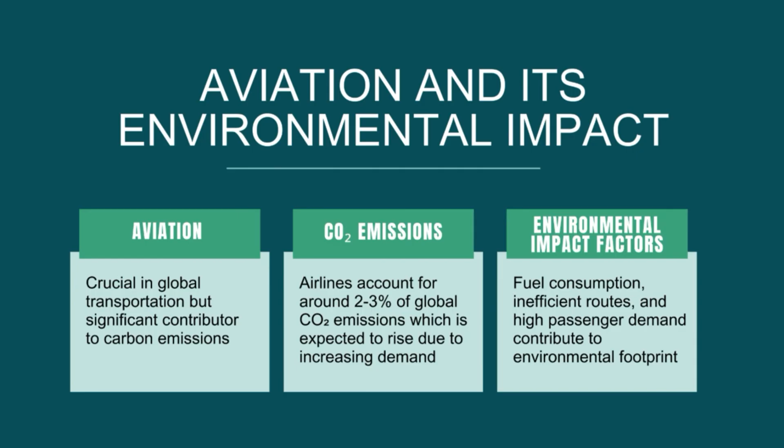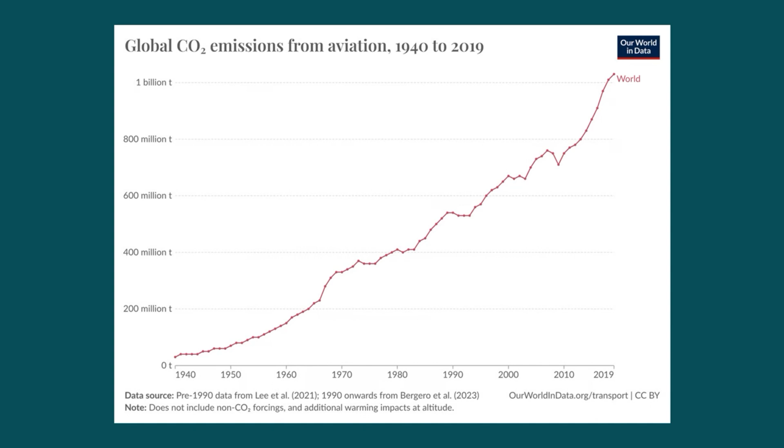Unlike cars and buses, where we are seeing electric alternatives, aviation doesn't yet have a large-scale solution like electric planes or hydrogen fuel that can immediately replace jet fuel. That means we need to look into other ways to cut emissions, like optimized flight operations, which is a big one.

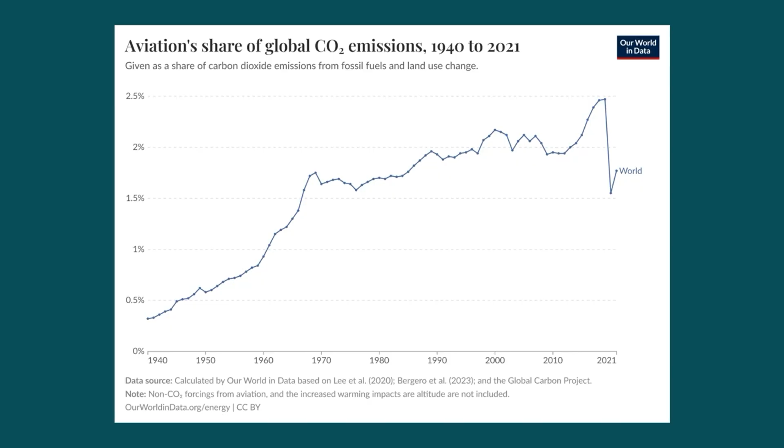So as the demand for travel continues to grow, it's crucial that we focus on sustainable strategies to reduce airlines' carbon footprint while maintaining efficient global transportation. So we talked about fuel and route inefficiencies contributing to emissions. So what about airline reservations? How do they fit into sustainability? We might not think of them as a major factor, but they play a significant role.

Reservations impact flight scheduling, route planning, and passenger load factors, all of which affect emissions. When flights are underbooked, they still burn the same amount of fuel, but with fewer passengers, increasing emissions per person. Inefficient reservations lead to last-minute changes, extra stopovers, and higher fuel consumption.

The solution is a data-driven reservation system that can improve seat allocation, predict demand, reduce unnecessary flights, and many other things. By optimizing schedules, we can cut down emissions and make flights more efficient. And this is where sustainable analytics frameworks come in.

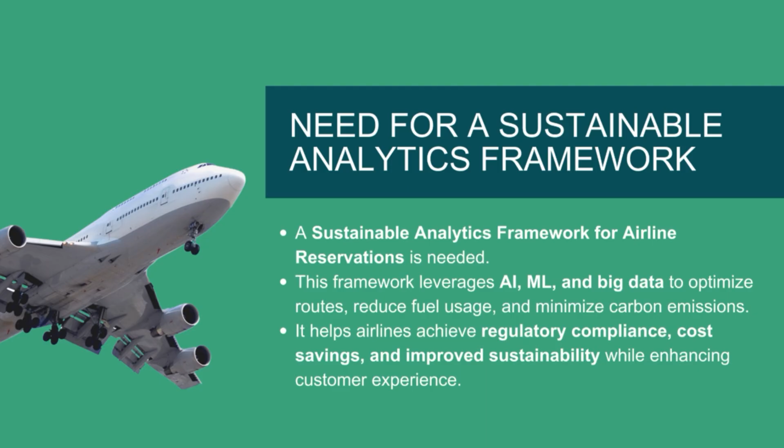So to address the challenges we discussed, airlines need a sustainable analytics framework, a system that uses artificial intelligence, machine learning, and big data to optimize airline operations. This framework reduces emissions, lowers fuel costs, and enhances sustainability efforts. It also helps airlines comply with global sustainability regulations, ensuring long-term environmental responsibility.

This framework is built on 4 key components, each playing an important role in improving airline sustainability. So we have data collection. The first step is gathering flight data, weather patterns, fuel usage, and passenger trends. This helps airlines understand their operations better.

Second is optimization and analytics, where we use AI and machine learning algorithms to analyze this data and find the most fuel-efficient routes, reduce idle time, and improve passenger load balancing. Also, real-time insights are important, as they help airlines make informed decisions on scheduling, aircraft allocation, and route planning. And it helps them provide eco-friendly travel options.

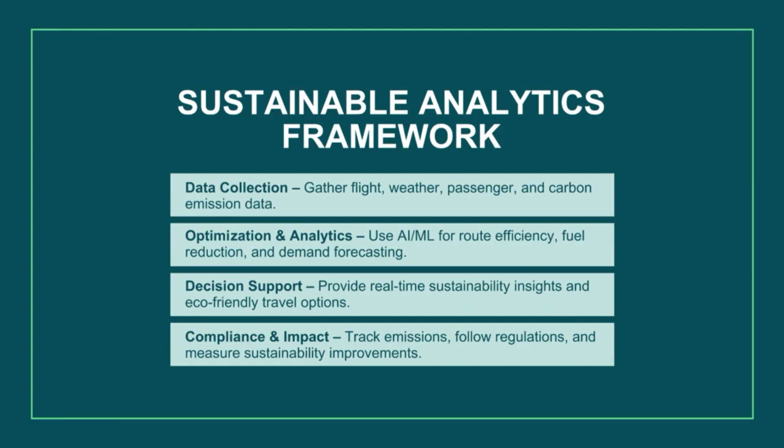So the last one is compliance and impact tracking. This framework ensures that airlines meet sustainability regulations like ICAO, IATA, and CORSIA, while also tracking emissions reduction progress. So what are the real-world benefits of this framework? Here's how it makes a difference.

The first benefit is that AI helps airlines select the most fuel-efficient path, cutting unnecessary fuel burn, and it reduces operating costs as well. The second one is lower carbon emissions. By reducing waste, airlines decrease their overall environmental footprint. And also they can provide eco-friendly travel options.

Passengers can get insight into their carbon footprint and can make more sustainable choices. Another benefit is better scheduling and load factors. Flights run closer to full capacity, reducing the number of empty seats.

Regulatory compliance is another benefit. The airline meets strict environmental guidelines, avoiding penalties and maintaining a positive brand image. Finally, a stronger market reputation. Eco-conscious travelers are more likely to choose airlines prioritizing sustainability. Ultimately, this isn't just good for the planet, it's also good for the business too.

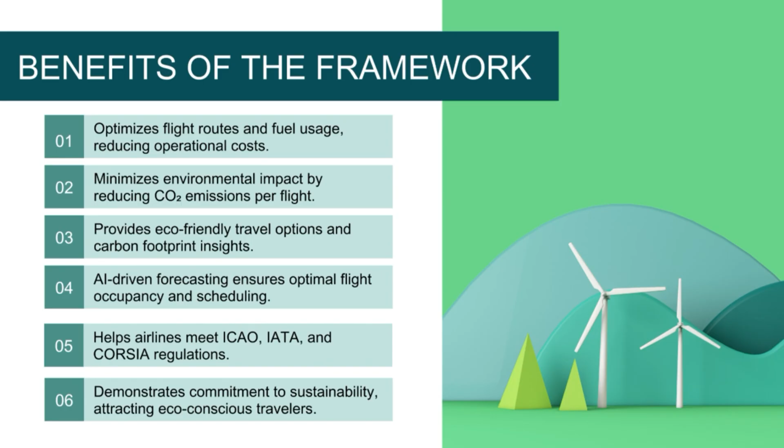Hi, I'm Chloe. I'm going to be talking about parts of our framework, first starting with the optimization of flight routes. Here I'm going to be talking about user-preferred routing and the Advanced Air Traffic Management System.

So first starting with user-preferred routing, or UPR for short. This allows pilots to select their own flight paths instead of following the fixed airway path. This enables a more direct and fuel-efficient route. The way this is implemented is that airlines would use real-time weather, wind patterns, and air traffic data to determine the optimal route to their destination. Some of the benefits include reducing flight time and fuel consumption, and it also lowers carbon emissions and improves the overall flexibility of their operation.

An example of this was implemented in Australia by Airservices in trials, and they saw that UPR helped reduce fuel burn by up to 26 tons per year for every route, and it cut emissions by 82 tons of CO2 annually.

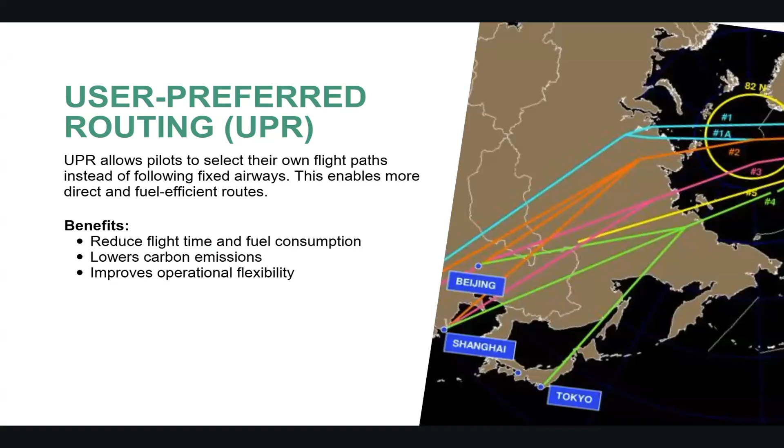Next is the application of advanced air traffic management systems, or ATM for short. This allows air traffic control through the use of automation, AI and satellite-based navigation to improve overall flight efficiency. Examples of this innovation in the US include NextGen, which uses GPS-based navigation for more efficient flight paths. And in Europe, they applied SESAR, which aims to integrate AI and automation for traffic flow to ensure fewer delays in flights.

The benefits of applying this include reducing the holding patterns of flights on the ground and any unnecessary fuel consumption while they're on the ground. This also improves on-time performance and increases overall safety and efficiency of the flights.

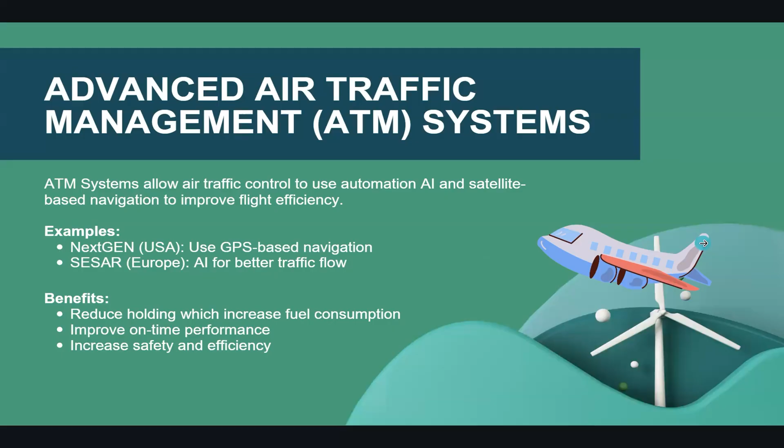A case study of the application of these innovations is Finnair. They looked at sustainability efforts in optimizing their route efficiency. The problem they were seeing was high fuel consumption and emissions, which impacted their cost and sustainability efforts. The way they navigated this was the use of AI in their planning software, which helped in optimizing their routes and saving fuel every flight.

They did this through optimizing their fleet use. They would change the aircraft based on what was more efficient for the number of passengers booked, whether that be using a bigger or newer aircraft or a smaller aircraft, depending on demand, as well as route optimization. Utilizing wind-assisted navigation was ideal, or direct flight paths to help figure out a route.

Another strategy was continuous descent approach. This is where the flight would reduce fuel burn when landing by having a straight or smoother descent overall. And then fleet modernization. A lot of newer aircraft help reduce fuel use, and an example is the Airbus A350, which reduces fuel use by 25%.

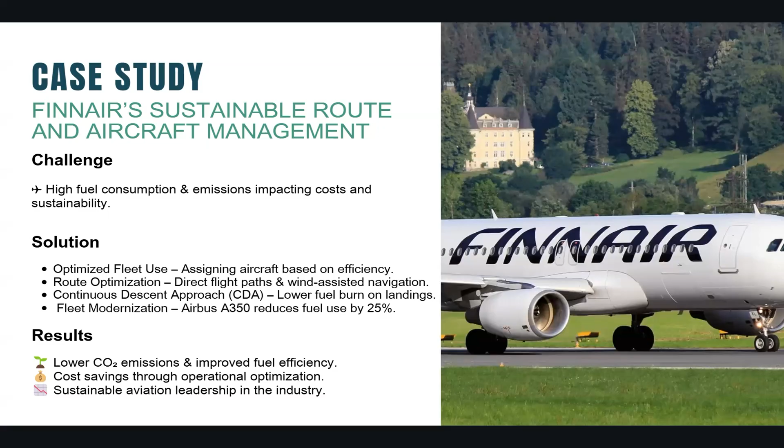As a result of these implementations, they are lowering the CO2 emissions on their flights and improving their fuel efficiency. This led to cost savings through the optimization of the whole operation, and they've shown leadership on the sustainability side of the airline.

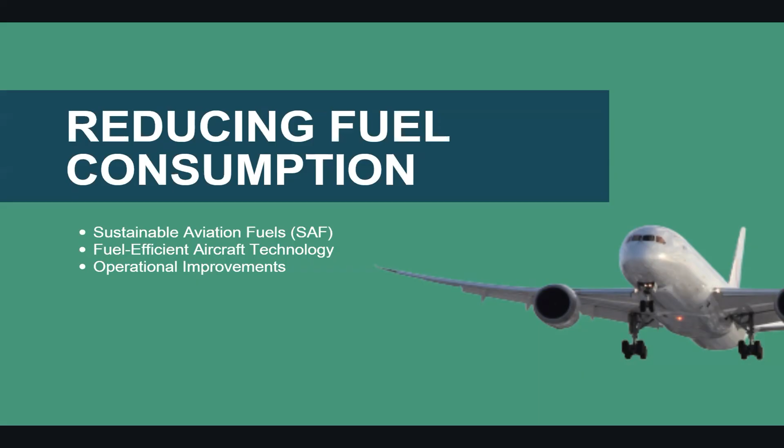Next, another part of our framework is reducing fuel consumption. This includes sustainable aviation fuels, fuel-efficient aircraft technology, and other operational improvements. First, sustainable aviation fuels, or SAF for short. These are alternative fuels derived from renewable sources, which include waste oils, agricultural residues, and non-food crops. They are designed to be a direct replacement for the conventional jet fuels used in planes today.

The way this would be implemented is that they would look for sources that are easily renewable and create a fuel that integrates easily with current aircraft. Some of the benefits are that this fuel helps reduce greenhouse gas emissions by up to 80% compared to traditional jet fuel, and being able to easily blend with conventional jet fuels makes it easy to integrate into the current system and use in existing engines without needing to modify much.

Some examples of adoption: as of 2022, over 360,000 commercial flights have used this alternative fuel at 46 different airports, primarily in the United States and Europe. As well, for expanding production, a lot of investments have been made, for example by the US Department of Energy, which approved loans to expand refineries within the country that produce sustainable aviation fuels.

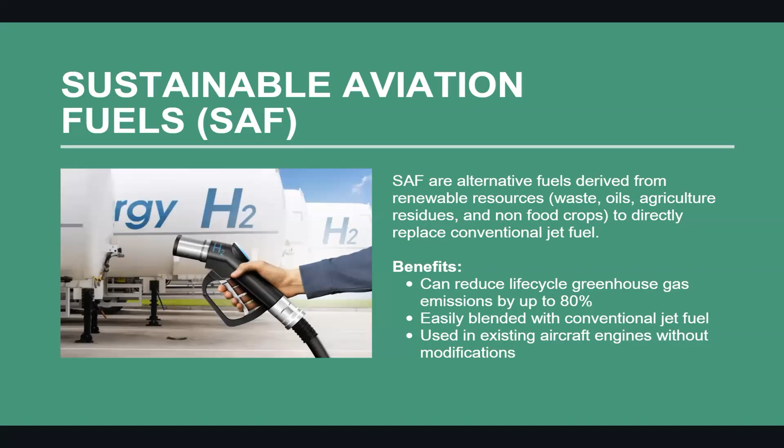Next, looking at fuel-efficient aircraft technology. The goal is to look at advancements and research initiatives to improve the engine, aerodynamic enhancements, and sustainable programs. Specifically, there are engine improvements. Many modern engines offer a 10% increase in fuel efficiency over previous models, so it's more ideal to use them.

Aerodynamic enhancements, taking reference from bird flight, use improved wings to reduce fuel consumption and also reduce noise pollution.

And as well, lightweight materials. They have different new composites and material usages to reduce the aircraft weight, which leads to significant fuel savings.

Some research initiatives that are being done towards this new technology is the Clean Sky program in Europe, which is a public-private partnership that focuses on the development of technologies that create more environmentally friendly aircraft, and as well at Boeing, they have an ecoDemonstrator program, which is their initiative to test and implement these new technologies for improved fuel efficiency and reducing emissions.

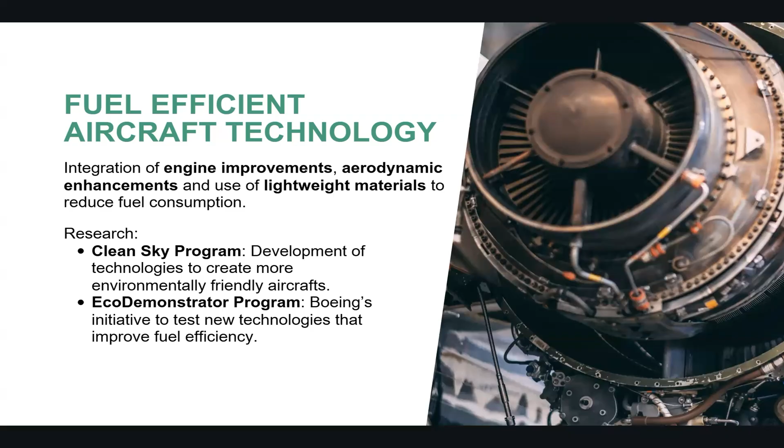A case study of the adoption of sustainable aviation fuel is the Air France-KLM parent group. They recently signed a 10-year agreement with TotalEnergies for about 1.9 billion liters or 1.5 million tons of this new sustainable aviation fuel. And this is produced directly from waste and residues, mostly in France, the Netherlands and other European countries.

They saw this challenge of looking for alternatives to conventional jet fuel, especially with their large fleet. And they also want to increase sustainability efforts. So they were the leader and the first adopters of this new fuel alternative. They saw that this fuel adoption reduced the life cycle CO2 emissions by 75 to 90% compared

to traditional fossil fuels. And on top of adopting this in their aircraft, they also looked at different partnerships to further improve the production of these new alternative fuel options. So they partnered with SkyNRG to develop Europe's first dedicated production plant for SAF in the Netherlands. This uses different regional waste streams, like cooking oil and sustainable hydrogen, and they were able to achieve an 85% CO2 reduction as a result.

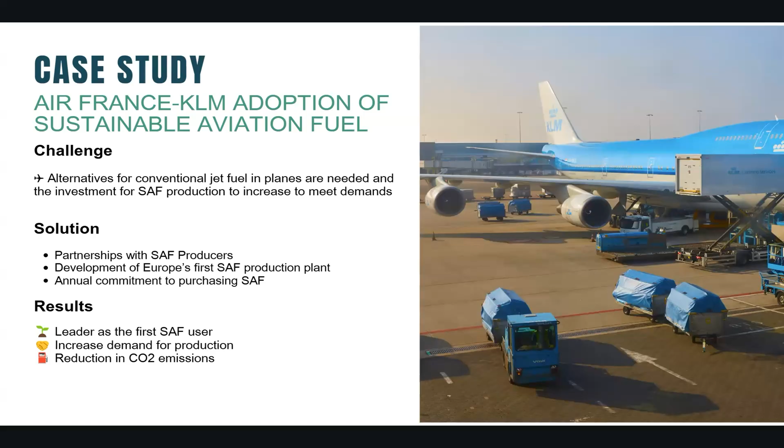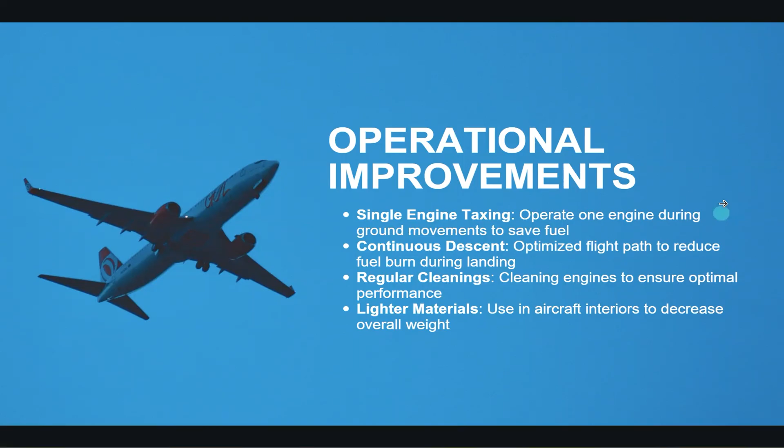So, airlines can enhance sustainability with key operational changes. Single engine taxiing: using one engine during taxiing saves fuel. Continuous descent: optimizing landing paths lowers fuel burn. Regular cleanings: cleaner engines improve efficiency. Lightweight materials: reducing aircraft weight improves fuel consumption. So these small but effective adjustments help to cut costs and emissions without major infrastructure changes.

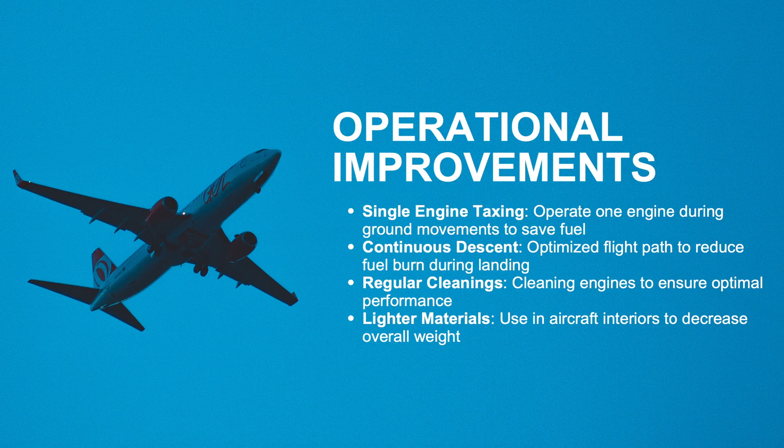So talking about minimizing carbon emissions, there are two ways to solve this problem: carbon offset programs and the CORSIA framework. So carbon offset programs. Even with sustainable practices, flights still produce emissions. Carbon offset programs allow airlines to compensate by investing in eco projects. How it works is you calculate a flight's carbon footprint, offer passengers or airlines the option to buy carbon credits, then invest in projects like reforestation, clean energy, or emission reduction.

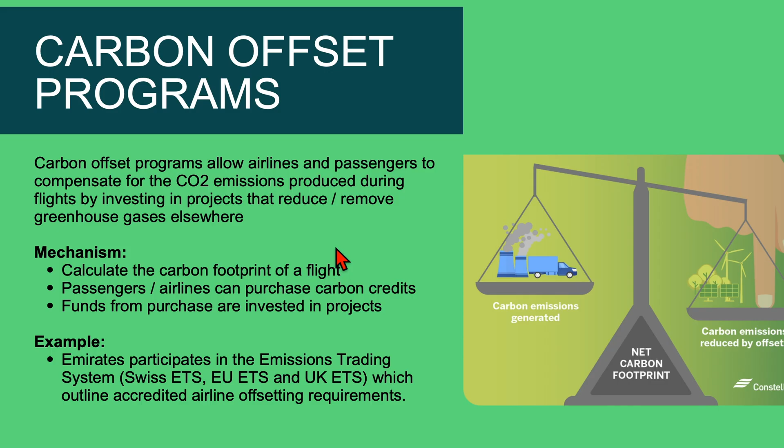For example, Emirates participated in an emission trading system to meet sustainability targets while supporting global carbon reduction efforts. The next method for minimizing carbon emissions is CORSIA, the Carbon Offsetting and Reduction Scheme for International Aviation. Developed by ICAO, the International Civil Aviation Organization, it helps to stabilize aviation emissions worldwide. The benefits are standardized global carbon tracking, investment in certified emission reduction projects, and it also encourages airlines to adopt sustainable strategies.

So why data-driven decision making for sustainable airlines? Data analytics is critical for sustainable aviation. Airlines use real-time tracking and AI to cut waste and reduce emissions. Key applications include carbon emission tracking, energy efficiency, waste management, and supply chain transparency. By leveraging big data and AI, airlines make smarter, eco-friendly decisions while enhancing operational efficiency.

So we'll talk about one case study, which is Lufthansa Group's partnership with Google Cloud. Lufthansa partnered with Google Cloud to optimize airline operations through AI-driven data analytics. The challenges they faced were the need for better flight planning and efficiency, and high fuel consumption and operational costs at the time. The solution was a cloud-based AI platform integrating fleet, passenger and fuel data, using Google BigQuery and Vertex AI for real-time efficiency tracking. The result was 7,400 tons of CO2 emissions saved annually, optimized flight routes and reduced delays. This shows how AI-powered analytics can revolutionize sustainability in aviation.

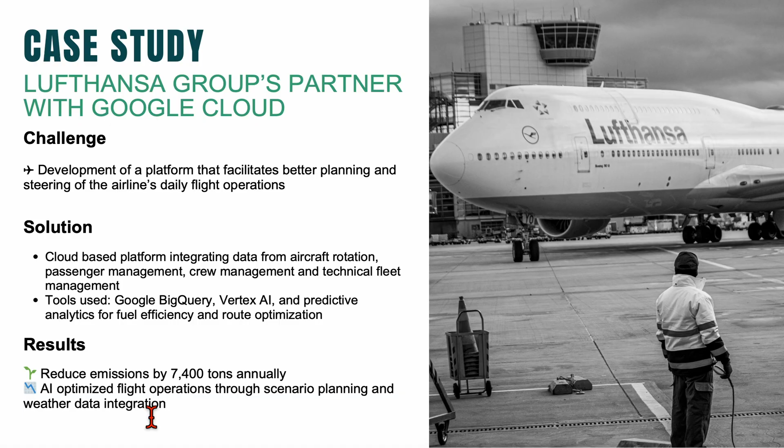So let's talk about challenges. Implementing a sustainable analytics framework has its own challenges. Data complexity: integrating multiple data sources can be difficult. Real-time processing: high computational demands can be hard to manage. Passenger behavior: encouraging eco-friendly choices. Regulatory compliance: adapting to evolving sustainability laws. Despite these hurdles, the aviation industry is making strides in sustainability.

So the key takeaways: optimized flight paths reduce fuel burn, sustainable aviation fuel (SAF) is the future, AI-driven analytics enhance efficiency, and carbon offset programs help balance emissions. By adopting smart analytics, AI, and greener fuels, airlines can balance profitability with environmental responsibility, ensuring a sustainable future for air travel. Thank you.